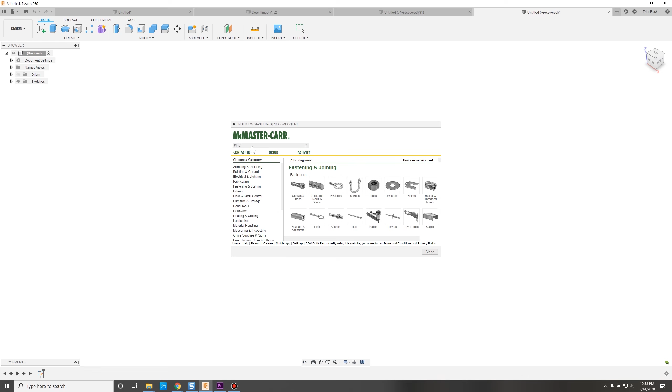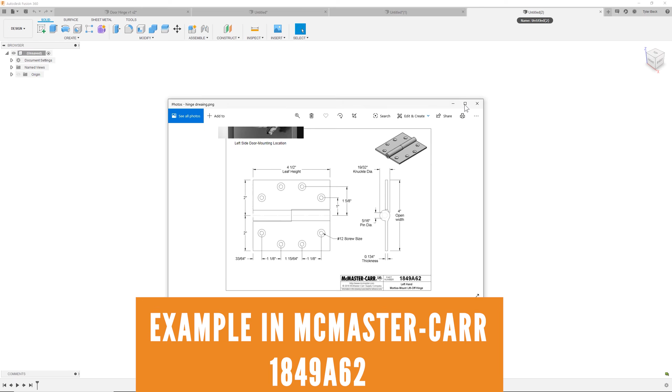So we'll start a brand new design file in Fusion, and now what we want to do is create this design. So just a little bit of thought first. We could start by sketching this shape and extruding it down and then adding this round boss as a separate profile. We could also try sketching this profile and extruding that out. I think this is what I'm going to try first. So I've actually tried both, and this one was a little bit easier for me. So let's try that style today.

First thing I'm going to do, because I'm doing an assembly in Fusion, or I think of multiple parts, is create a new component, and that's the component I'm going to build the first part in. First thing we're going to do is start a sketch.

Before I do that, my settings, I don't have the grid turned on, but that's where you can turn on your grid settings if you'd like that for the sketching. And also there's some great preferences you'll want to know about. I'm going to link out to this interface video that I did explaining how to get set up as a beginner and as a new user in Fusion.

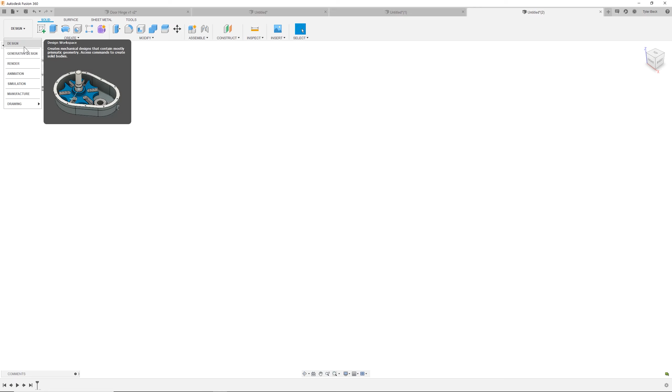First thing, document settings. I'm going to make sure that this is set right. I'm going to set mine to inches. We're in a new component. You can tell we're working on it because it has a little dot next to it and it's active. We're going to be working in the design workspace. You can see your other workspaces like simulation and cam and manufacture.

What I'm going to do is start a sketch. Select the sketch toolbar. Select the front plane. For sketching, you always need to be on a face or a plane. So first thing, I'm going to just start sketching a shape.

I'm going to sketch this rectangular shape, and I could use the rectangle—that'd actually be a little bit smarter. So I'm going to select it and do rectangle. I'm going to use the S for search to find my rectangle. This is a modal toolbar, it's sensitive to what you're in, so we're in a sketch, my favorite sketch stuff shows up, as well as the search helps me find what I care about without having to go search through all the menus.

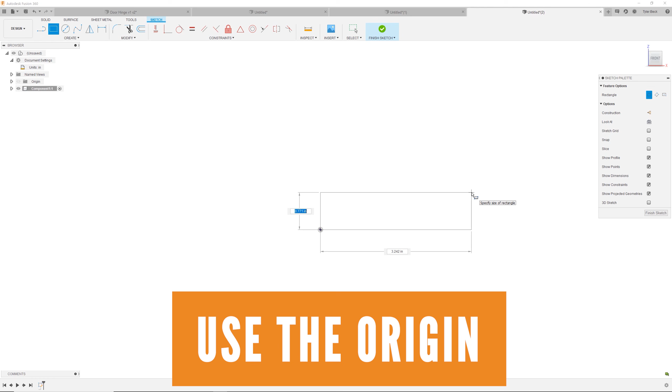So I'm going to do a rectangle from the origin—use the origin when you start just because it puts your planes there and it helps you define the sketch. So I'm going to type this in: 0.134, hit tab, and put in the value. Great, so we've got this rough shape drawn.

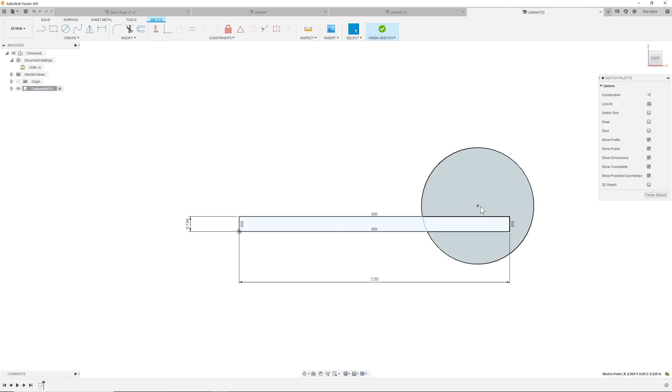Now we need a circle, and I actually don't know for sure where it goes yet. I don't know if that center point is down below or above. I don't have a dimension in the drawing. Referencing that from the model, it's actually 0.031. They didn't put that in the drawing, but I went and got that for us. So there we go, we've got that distance.

I actually don't want a dimension to this edge. I'm going to delete that, or I could replace it and put it to a different point or edge. But I'm going to place a new one at 2 inches to the center there.

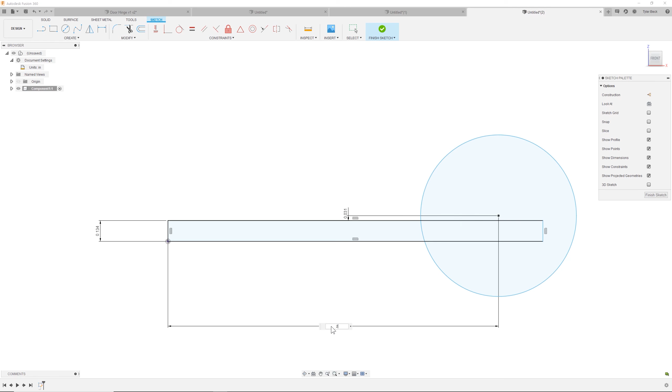I'm going to use the trim tool, S for search to wake up the trim. And what you do for trim is you just drag it over what you don't want. Great—oop, there's a little extra there, don't want to miss that. It was a little messy.

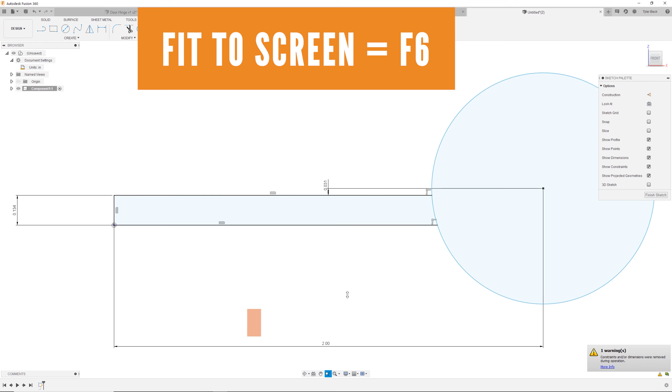To fit this to the screen, I can use the fit to window, or you can double click on your middle mouse button—it'll fit everything to the screen. All right, so I want to add an angled line here.

Draw it in, and then I'm going to dimension it. That's the horizontal distance between the points, that's the vertical, and this is the true length of that line. And that should be 0.236.

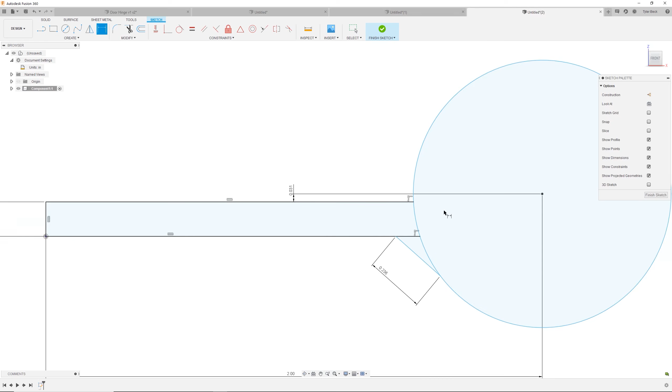Okay, so what are we missing? What's blue? Well, it looks like I haven't defined the diameter. I'll place the dimension for the diameter, and it's 19/32nds. How do you type that in? You can just type it in, 19 divided by 32, and it converts.

What about this angled line? We don't know what angle it's at. We haven't defined that yet. So one thing I do know is I'm going to trim it. And what I would like is a nice smooth transition from this line to this arc.

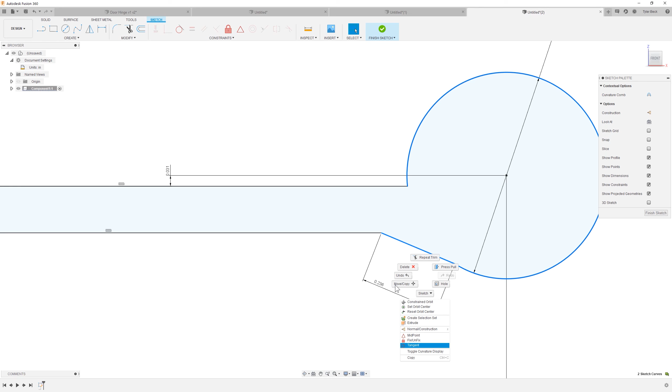Select the line and the arc, right click, choose tangent. The other method, come up and find tangent on your toolbar. Both give you the same result. You'll notice everything went black - that means it's fully defined.

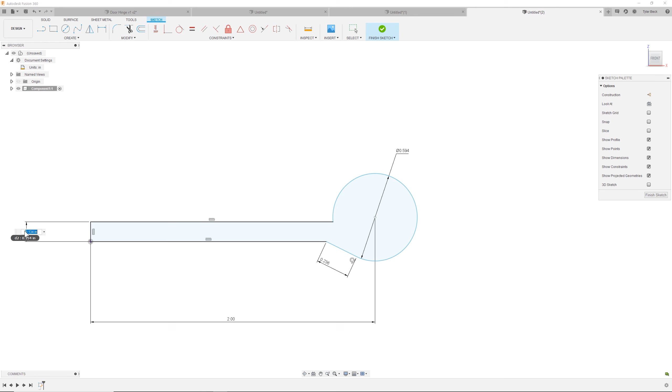But so what? Who cares if it's fully defined? Let me show you real quick why it matters. So this dimension, if I were to delete it, and I were to dimension this to 0.3, it should have stayed up above that upper arc or upper edge, and it won't because we don't have it fully constrained the way we want it. And that's why you want to have a fully defined and fully dimensioned sketch.

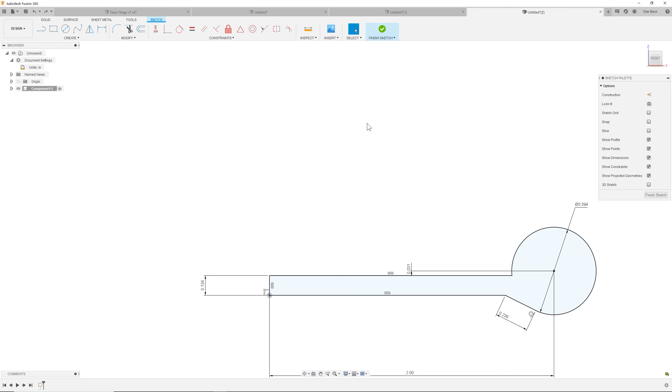Okay, now let's finish the sketch and give this depth. So we're going to extrude this model. We can extrude it either way. Do it 4.5 deep. Great, so we have a sketch and an extrude.

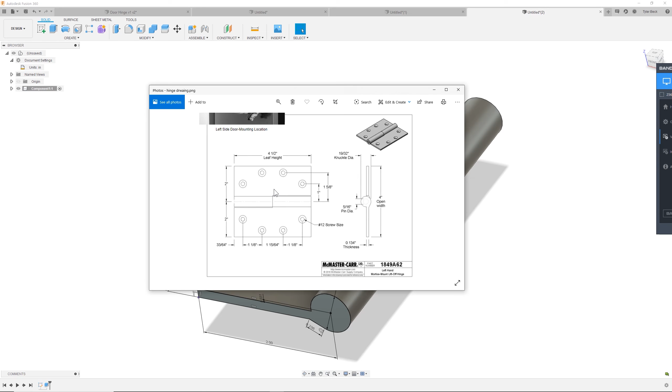Okay, so for some more strategy, what about these holes and should we mirror this? It is basically a symmetrical part, so I would like to leverage the work we just did and not have to start over. I'm gonna go ahead and put the cuts in and mirror it.

Okay, so let's use the hole command, S for search, type in hole. One challenge we're facing is getting the right countersink dimension. So I don't know what these are. When I look at the drawing, it's calling for a number 12 screw, a wood screw. So let's figure out what those dimensions are.

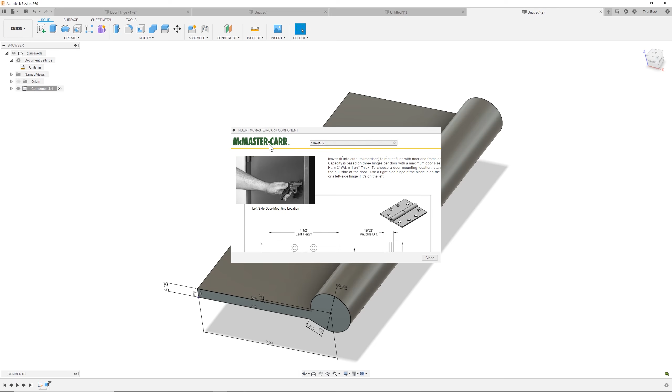Well, one way we could do that, insert McMaster-Carr, right? We go out and we can search for that number 12 screw. So I'll do a wood screw, number 12, a short one. In this drawing, it has some dimensions that we can use. Great, so we know the outer diameter now, we know this angle, and we know this diameter as well.

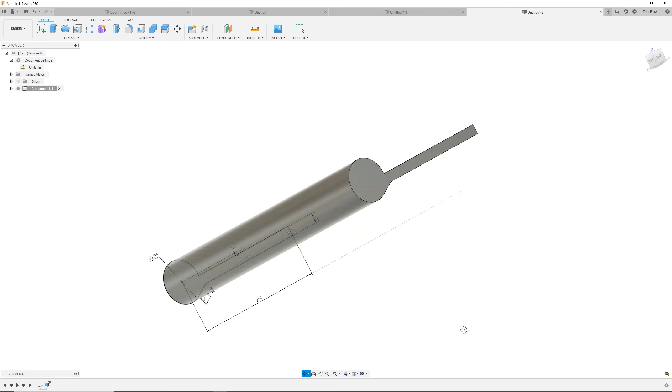Great. Okay, so where do the holes go? Okay, now let's do the hole command. So we'll select this face, we're going to put it there. We're doing a countersink straight through a simple drilled hole. We'll go all the way through it, 1/2 inch. This outer diameter of the countersink, 0.438, this angle, 82, and this bottom diameter, 0.216.

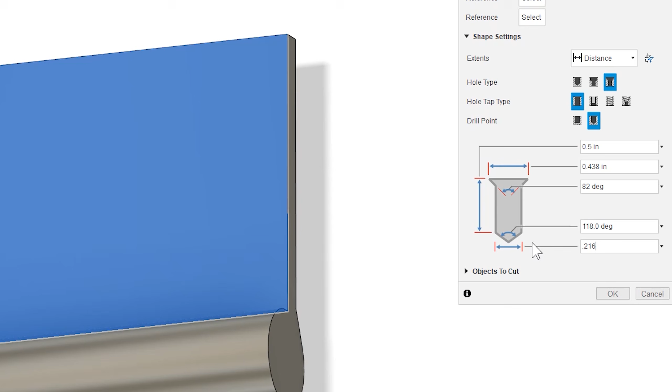Okay, so now we have this hole, but what we want to do is start a sketch, and we want to put the points where this is going to go. If you'd like to reorient your design that you're looking at, you can use the view cube. I'm going to rotate it 90 degrees, make it a little bit easier to look at. There we go. Start the sketch, and I'm going to drop some points.

I'm going to search for point, and I'm going to drag on 1, 2, 3, 4, and then I'll start dimensioning where these sit. So that's 1 inch, and I'm going to line these up.

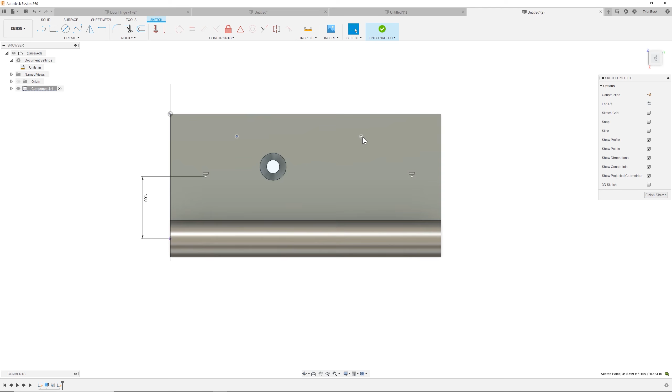I'll select the two and make them horizontal. These two should be horizontal with each other. These are dimensioned off of each other at 1 1/8. Same thing. And the distance to the edge, 33/64. Great. Are we fully defined?

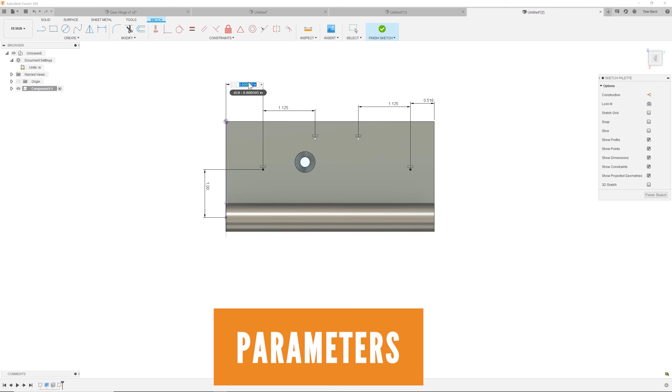Not yet. Same thing. Now, is there a way to make these dimensions talk to each other? Absolutely. You can actually place it, and then you can double click and select this other, and it'll just immediately map. This one is called D17 in this example.

So by clicking on it or typing in D17, you can see now it's driven by a formula or an equation. If you'd like to learn a little bit more about equations, I've got a video in the description linked down below. Check that one out.

Okay, so what else is missing? So the height here is still missing. Drag in a dimension of 1 5/8. Sorry, I think I typed in 15/8, right? So 1 space 5/8. There's a little gotcha there.

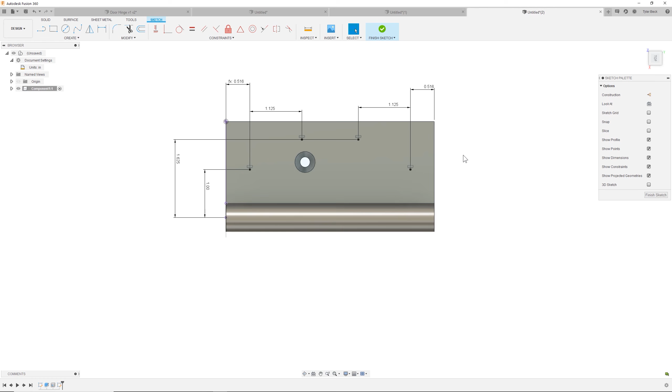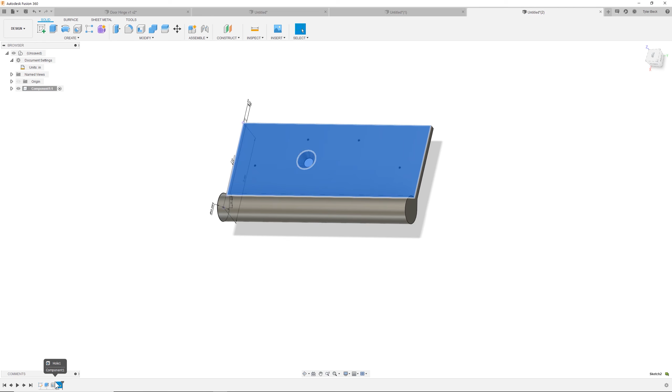That looks better. Okay, so now that we have these points, what do we do? How do we tie it to the hole? So we'll finish the sketch. And now I'm going to go to the hole command and I can't reference the sketch. So did I do it out of order? Did I mess up? Well, luckily, this is where reordering can be very helpful in Fusion. So you can actually drag this before the hole command. Pretty cool.

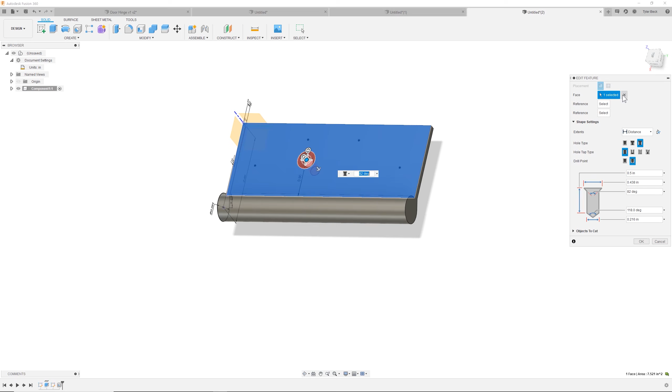So let's right click on the sketch I dragged in front of it, and edit the feature. Now that the timeline is working, I'm still going to bump into a challenge. I'm going to do the hole wizard, but it's not going to want to update and leverage that reference sketch because it's kind of locked into how it's programmed. We can actually do it correctly now, but what's great is it remembers what we previously did, so we can use that reference sketch and those points and hit OK.

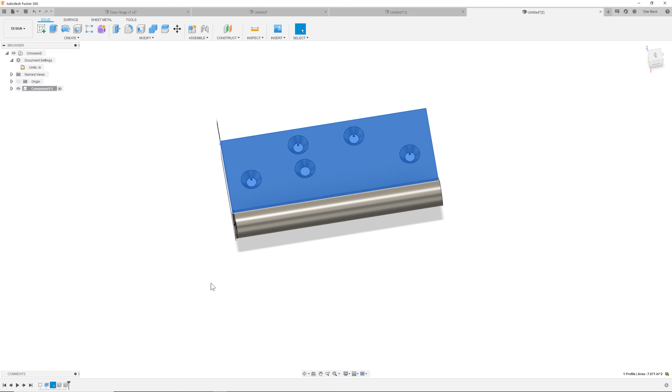So what do we do with this one? We can just delete that on the timeline, and there we go. So what did we learn? The order of operations: if you're going to do multiple points with your hole pattern, it's probably worth doing the sketch of those placements first, then doing the hole. But there are ways around it - if you forget, you can reorder the timeline.

Okay, next let's do the next component. We're going to mirror this particular component. If I search for mirror, I'm going to need a plane to work across, because we're mirroring a whole component, but we need a plane right in the middle that we can mirror across.

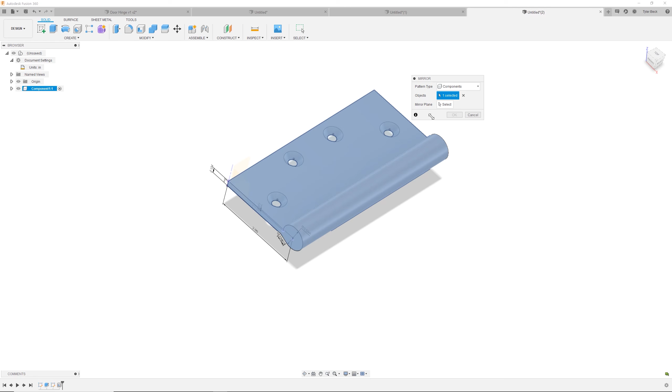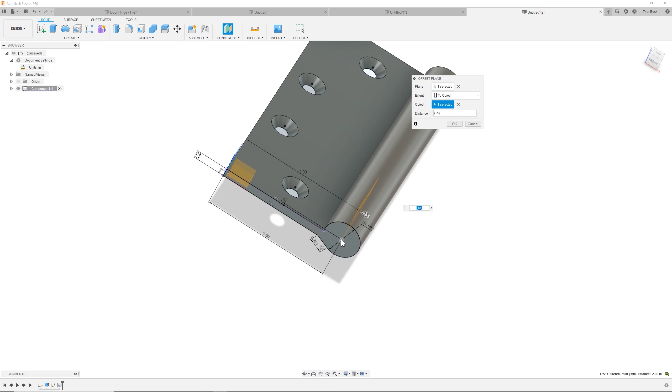Do we have one? When I look at my planes, mine are over in the corner, so I'm going to create a new reference plane. I'm going to offset a plane, just like this one, or that face, and put it at this point. So we select that point from the sketch, and it's now putting a plane right in the middle.

This plane is what we're going to mirror across. So I'm going to search and do mirror for this whole component, and it's across this plane. Great, so now you can see I have two different components.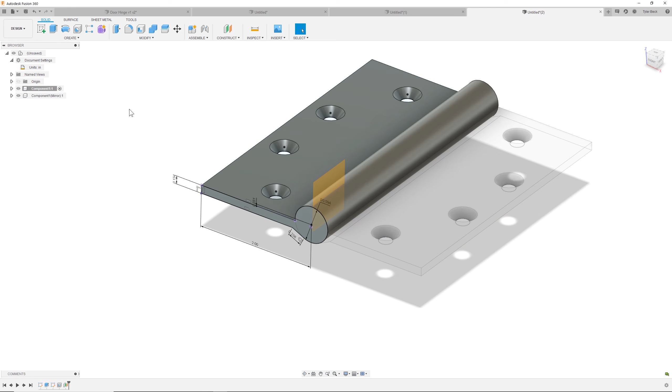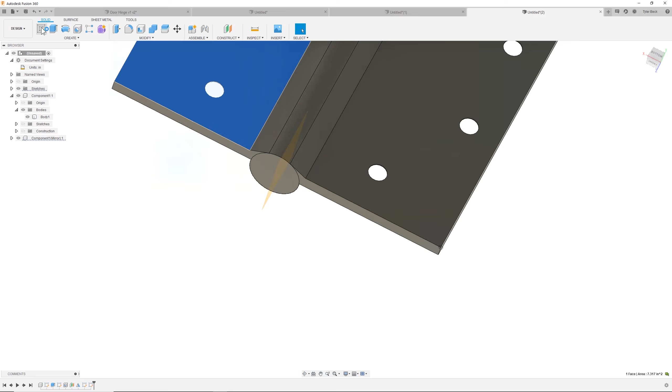And what do we need to do now? Well, we need to do some cuts and remove some of this geometry on each side. Next, what we want to do is this cutout - we want to chop this out. When I look at both sides, the top and the bottom, I'm going to start a sketch on this face. Select the face, hit sketch. There we go, bring it down, pan it down, zoom out a little bit.

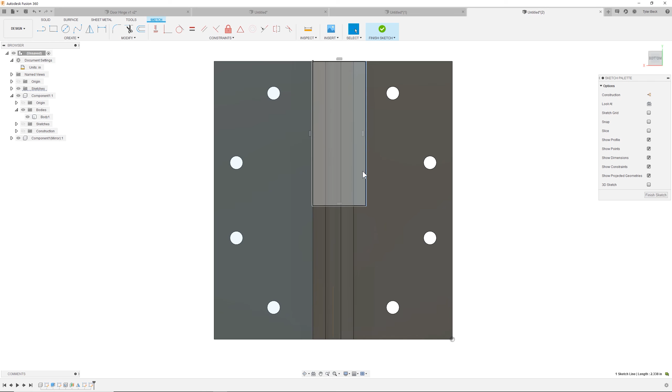Okay, so what I want to do is two rectangles, and Fusion's not sensitive to which one you're editing - we can effectively cut both from the assembly level. So I'm just going to sketch this rough rectangle. It didn't snap into place, so I'll select the line and the edge, do a constraint saying they line up or are the same line, then give it a dimension, 2.25, and we could then sketch the other rectangle, snap it into place. There we go, we have two rectangles.

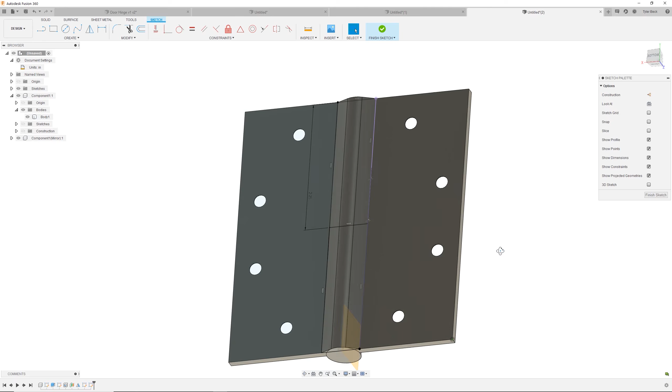I'm going to use the Q command - that's the press pull.

Hey, let's pause real quick. Before we make this cut on the door hinge, I want to talk about something that was kind of tricky for me to learn in Fusion, coming from SolidWorks and Inventor.

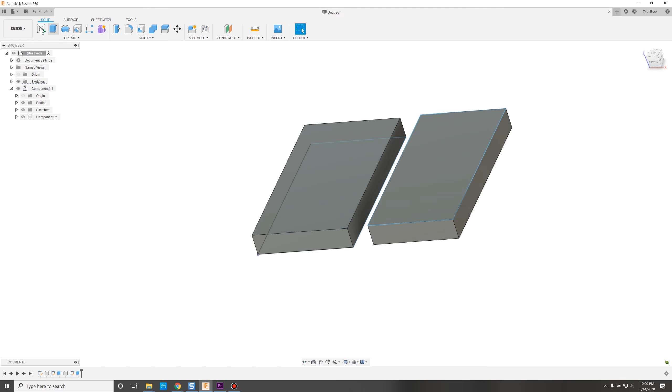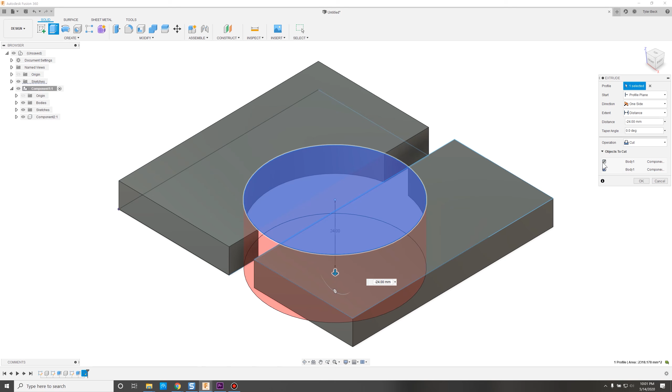For both of those, it matters what state or what component you're in. For Fusion, it doesn't really matter, but one little gotcha is if I were to do a circular cut with two different components - I make the circular sketch and want to make a cut - it doesn't matter where I sketched it. If it's in component 1 or 2, it cuts across both. One way to control this is to go to your cut, choose objects to cut, and choose which body you'd like to cut. I can turn it off, even though it wants to cut the second body.

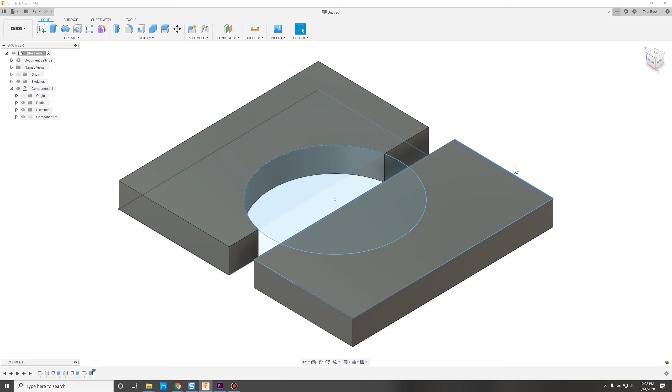I hit OK, it doesn't cut it. Another way to toggle this: the visibility of each component or body matters when doing the cut. If I turn this off, it's now only cutting the one that's visible. I hit OK, and that's the one that gets cut. Bring the body back visibility-wise, and you can see it didn't cut it.

So let's jump back into the door hinge now, and I want to wake up that sketch so I can hide the bodies that I don't care about for just a second.

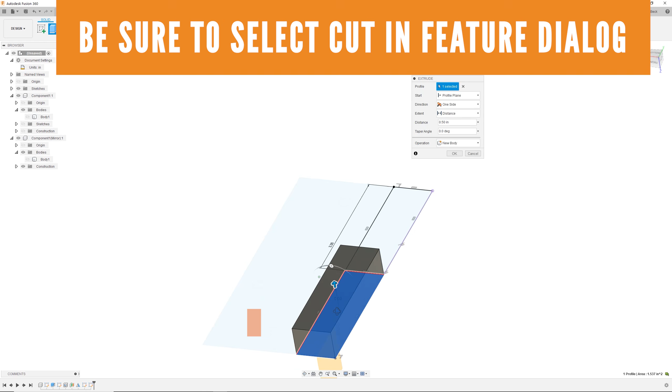And reference that sketch, that's one way we can do it. We actually just want to do one of them. We'll do the first cutout, it's going to happen to the body that we expose.

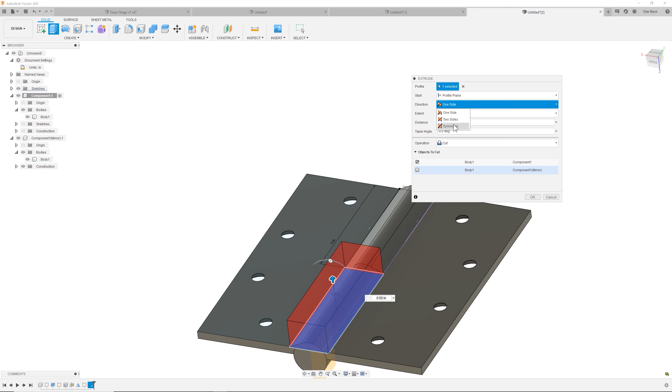I could do it by visibility, but I want to show you a little trick. Because it's cutting two different components, it's wanting to cut them both. I'm going to choose to cut the first body, only cut component 1, not this second mirrored one. And I'm going to do a symmetric cut where it cuts both directions all the way through.

Hit OK. Okay, kind of hard to tell. So if we hide that first component, hide the second one, there we go. It did cut it. Terrific.

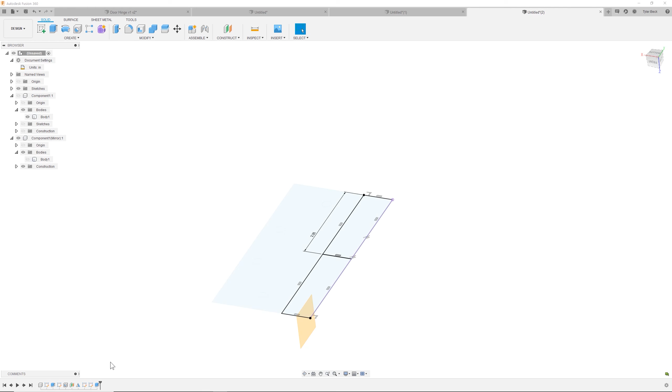Great, okay, so let's flip it now, right? So what we want to do now is cut the mirrored component. We're going to use that same sketch that we just did. We'll hit E. So we do symmetric all the way through, hit OK, and it cuts it out.

All right, let's look at both now and compare. Okay, and it does drag away. Those are looking pretty good. Cool, okay, so we're almost done.

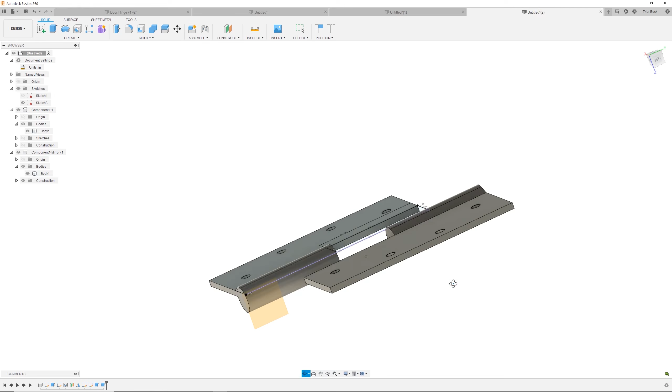We're almost there. We need to add a boss to that, cut this hole out so it'll fit together, and then add a joint. So we're almost finished. Bring these back, I'll hit undo, go to my home tab and it goes to this nice isometric view.

So what I want to do is hide this body. I'll select it and hit V. There we go, it hides the other. And what about this sketch? I select it, it wakes it up in the browser. I'll hide it, I don't want that in my way.

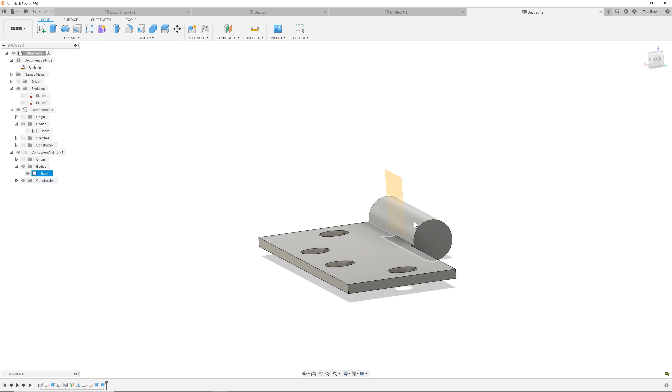I'm going to start a sketch on this face, a face through a plane, right? And I'm going to start sketching a circle. So I go to the edge, the outer arc, and it wakes up the center. I'll drag a diameter dimension on.

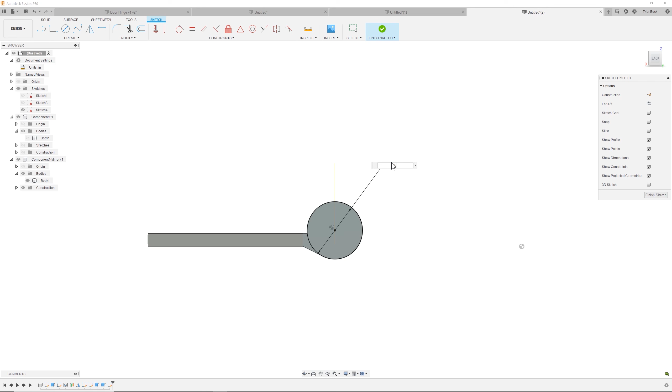It's 19/32nds, hit OK. Wrong one, my bad, it's actually 5/16. There we go, and we're going to extrude this out.

And this dimension should be 2.25. Looks good, it's all the way to the end. So pulling that dimension from the other model, I know that it's 2.25.

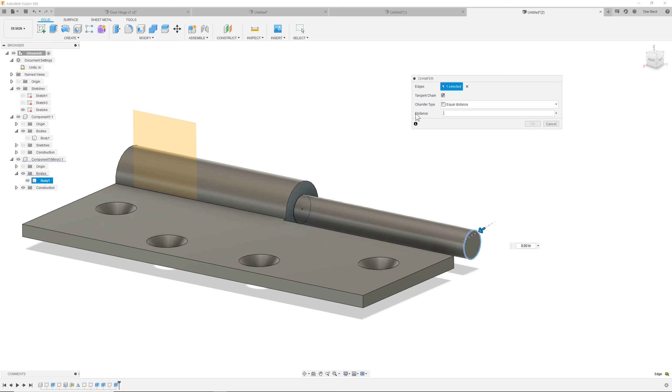I'm going to search for a chamfer and do this squared edge here, do 0.05. All right, so we've got this part done.

Let's just finish off the second one and then join them together. So the second component, I'm going to hide the first and wake up the second one. So now let's cut this hole out.

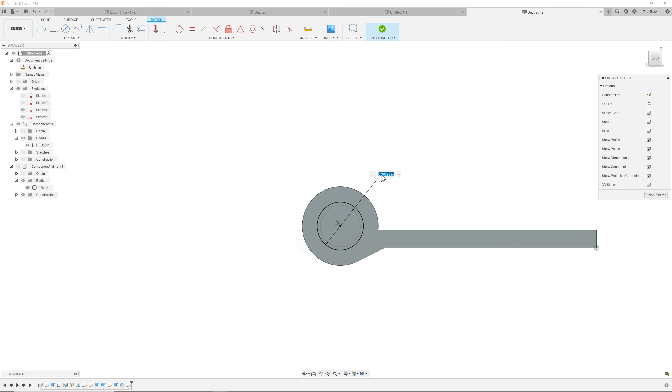I could do that at the bottom. It looks like I probably could use that same circle because it's the same size, right? So I could do that and just extrude the cut. Or if you'd like to put in the dimension, 5/16, sure is. Cut it all the way through. Now we have it cut.

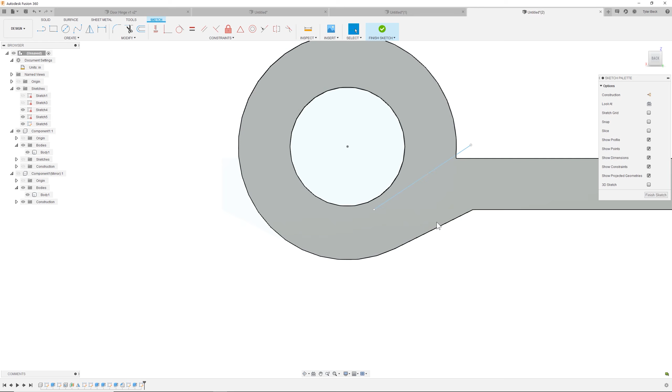Okay, so let's cut out this little squared slot. We have some of the dimensions from the other model. And what I'd like to do is a line coming off from here at some place. So a line, and I want the line to be parallel to this bottom line. So I'll select both, choose not equal, but parallel.

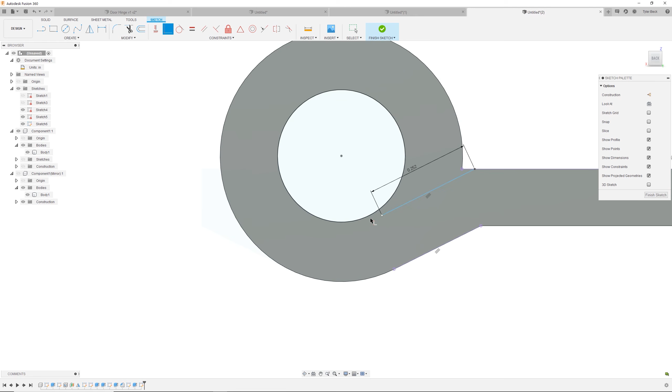I know the dimension of this line to be 0.252. Okay, so if we then snap this to connect those points, coincident and coincident. There we go, and we're going to sketch to finish this off to make the cut.

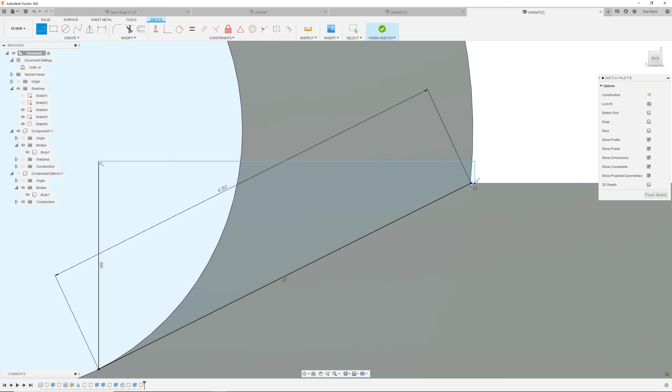I'm going to do this full like rectangular cut. Close this out, and this dimension is 0.031. Great, so let's cut this out.

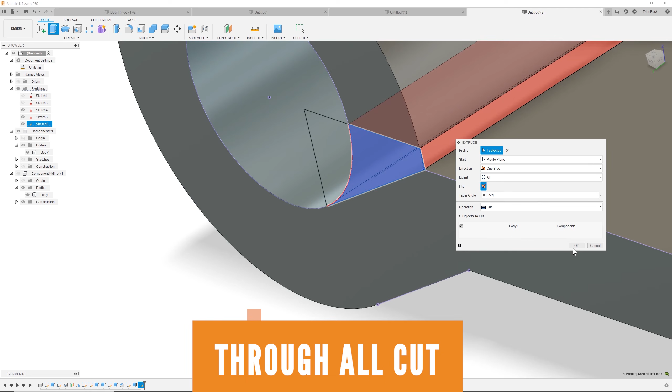And it's a cut, that's the tricky one. Make sure it's going the right way. Let's go the other way. And there we go, hit OK. Cuts it out. Okay, so if I turn off my sketches, so it looks a little more clear.

Now toggle the visibility of the hidden component by hitting V. You'll notice one, they just move around, right? So we need to ground one of them.

Okay, so if I right click on this component, I'm going to choose ground, and that keeps this one locked in space, and this one now needs to be joined. So let's do the joints.

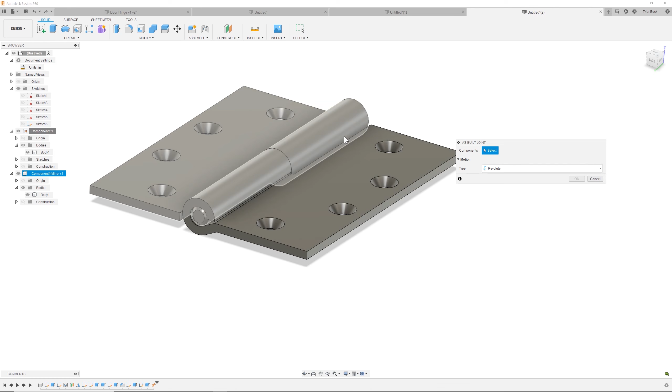If I do a search for joints, it's called an as-built joint. And what it does is I'm going to select the two components, and the position is here at this center point, and I'm doing a revolute around the z-axis. The revolute allows that movement. We'll hit OK, and now it's free to move about that z-axis.